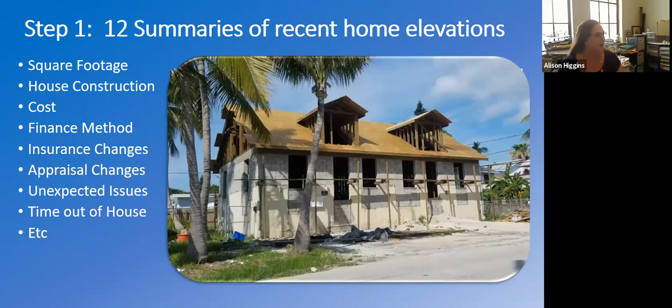This is where our partners really help us on these Keys-wide workshops. We want to hold these near our 5 biggest population centers, and this allows us to share what we've learned as well as document questions coming from our communities. We want to get as many contacts from interested parties, not only for this project, but for other opportunities that arise down the pike, because not everybody is going to be able to do this, even once we get them informed.

So the intent is specific outreach to low and medium income using our repetitive loss list, our county's weatherization program, because that is LMI based, and local Habitat for Humanity chapters that really have a specific program for homeowners that are low income. So they're on board to spread the word.

But then for the grand community, which is also obviously included, we're going to record webinars, newspaper stories, and radio interviews to help broaden this information for all. These pictures here are from the first concrete block elevation in the Keys. This is the case study for what happens when you invest too much on renovations and trigger FEMA's 50% rule mandating an elevation. This will be one of the most expensive examples in our repertoire.

The next bit is the one-on-one. So we've gotten across this general idea of what these might cost, but we'll have two different advisors made available by appointment to help homeowners work through their specific technical and financial issues in preparing to elevate. The intent is to give enough info to help the technical advisor, the elevation person, provide an estimate within $5,000. That will then help the financial advisor help them figure out a way to pay for it.

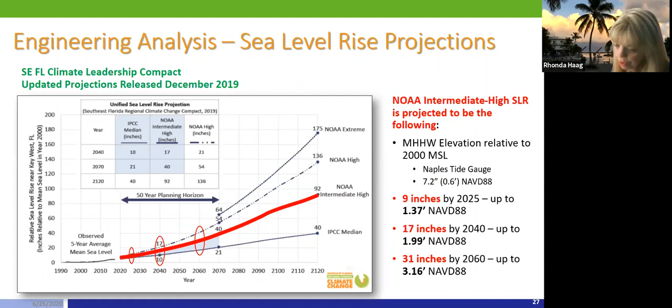Stillwright Point is a neighborhood in Key Largo, the northernmost area in the Keys. It's a very low level neighborhood. It's been around for about 45 years. It was built in a low area - they used fill from canals to build on, so it's very low.

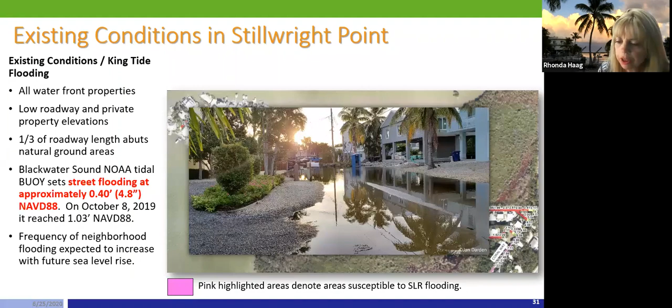This is an area showing one of the neighborhoods, what it looked like in the king tide. Another circle there, and that's this one coming up - just showing you examples of how it is.

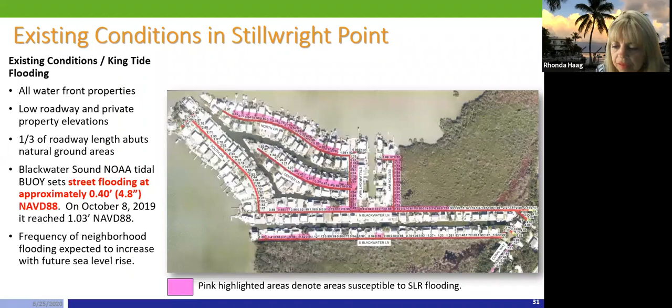So the engineering analysis currently underway is looking at the years 2025, current years, going up to 2045. 2045 is basically a target year, but we also glanced at 2060 and 2100 just to have an idea of the future inundation.

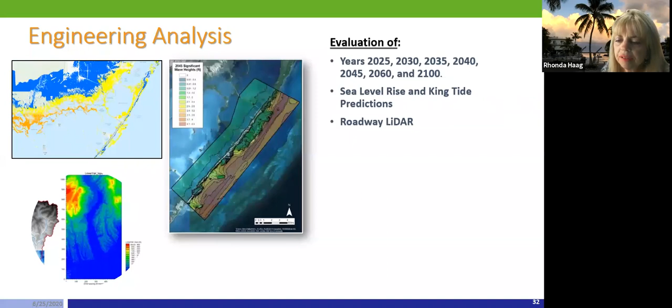Next, we looked at the sea level rise and king tide predictions. We used the mobile LiDAR.

When you're building higher and wider roads, you have to look at the anticipated storm surge in that higher, wider road. So you're going to have to build it stronger, able to withstand wind and waves and extreme events like hurricanes. Remember, when you have a higher road, it now has to be a stronger road.

This data will now allow us to project what the inundation is going to be on the road surfaces, and then allow us to complete our vulnerability analysis and prioritization of which roadways get elevated and when.

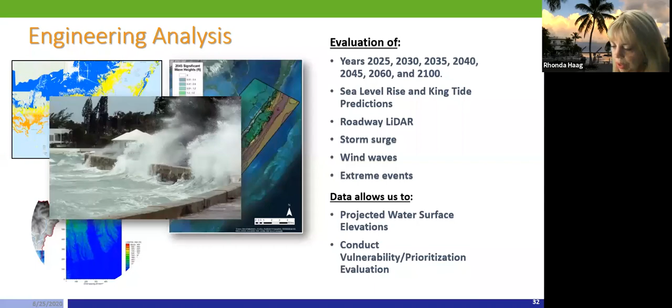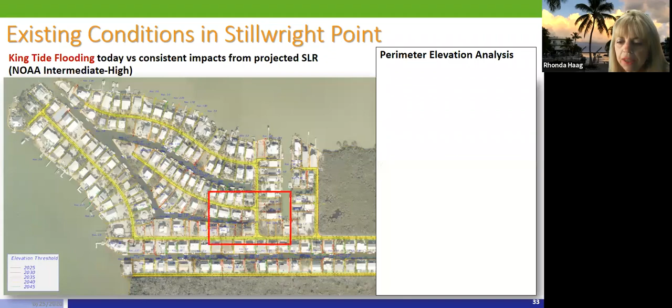So this is using the king tide flooding. We wanted to show it's a little bit different from sea level rise. Sea level rise comes in from everywhere. The king tide flooding is consistent with impacts from a projected sea level rise, but right now we are getting the impacts from the undeveloped properties. That's why they're very low and the water is coming in - they haven't been built up at all. It's coming in from the vacant parcels.

In the next 5 years, if we do nothing, we're now looking at increased access through 20 locations. By 2035, we're looking at 66 locations where access will come in for the king tides, and then 112. So you can see a pretty steep increase in king tide flooding if we do nothing.

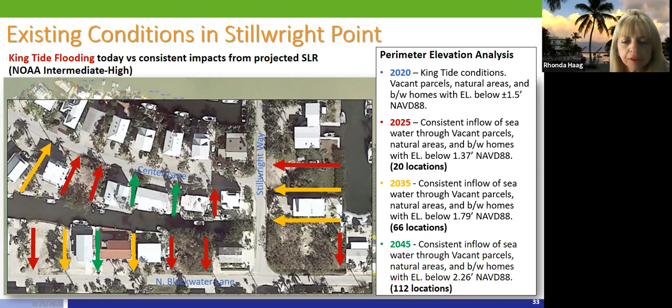So we came up with several options - actually 4 options. This first option is installing a curb and gutter system. We raise the road and then install a curb and gutter system to gather the storm water from the road and transport it away.

So there is front yard encroachment. All of these options have some level of encroachment. This one is a little bit less because we don't have the wider system you're going to see in the next option, but if we do elevate the roads, we are going to need to use a section of most residents' front yards to help build this higher and wider road.

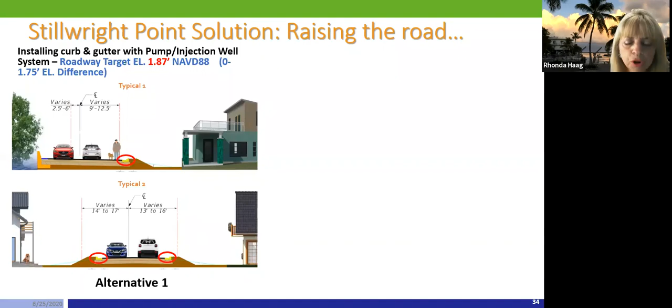And that's just a sample of where the curb and gutter system is.

So they're going to need to address the driveways, elevate the driveways. We don't know what we're going to do about that house on the left - there's not much we can do, but as the seas continue to rise, it's going to rise on the private properties. As a reminder, this approach only gathers the stormwater from the roads. So that's alternative 1. Alternative 2, next.

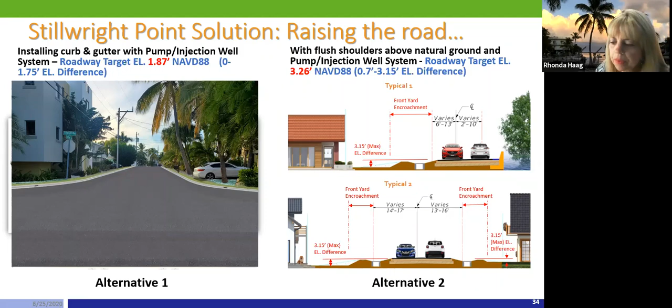Just an example of what this system would look like with the inlet box there, and we'd put a grate above that for walkability. So this is the current road again.

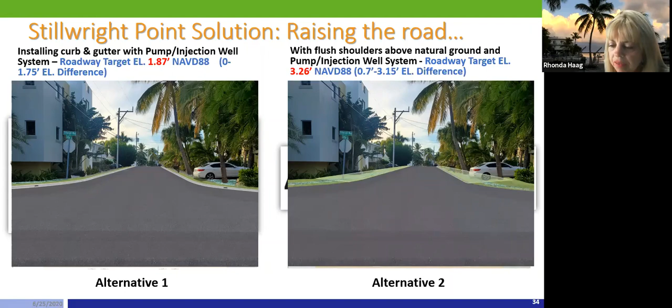You can see the green areas are where we need to reach out a little bit more. This is a wider system, so definitely more of an encroachment into the neighborhood. If you have neighborhoods with wider roads, it's not such a problem, but this area is very narrow.

As sea levels continue to rise and come into the properties, it will flow over into that stormwater swale at grade, and then we will pump it out. So we're looking at more operations and costs here because we'll be pumping almost continuously in the future. This is a much more expensive operation in terms of O&M, but it does help control water levels in the private yards.

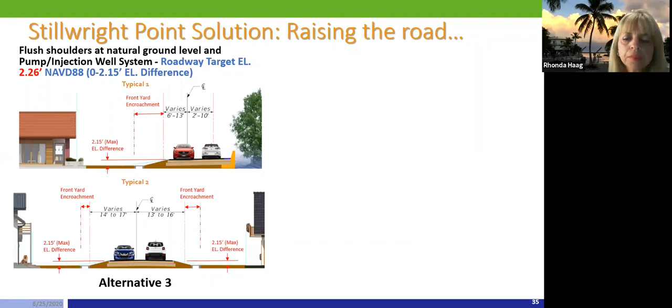To a degree. Wrapping up, you can just see an example there.

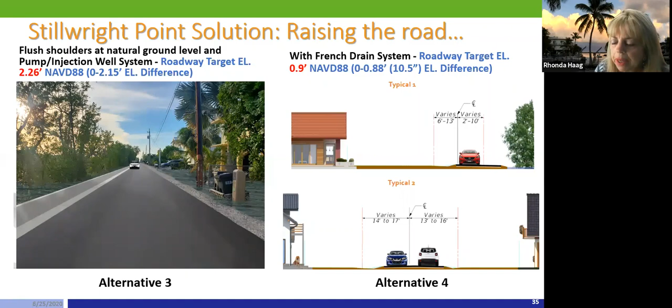And then the final one was where we just said, what if we just throw some blacktop on the road? So we looked at that. We're not elevating the road, we're only putting on about a few inches of blacktop. There's no stormwater system there. We would try some French drains, but with the elevated roads, we're not sure this would work.

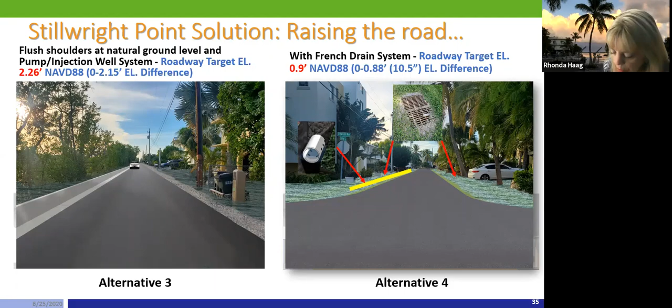You can see what this would look like. Basically, the water is going to come in and inundate it. The problem with this is when the water comes in, it's going to deteriorate the road conditions and it's not going to last very long. So this option is not really viable. It might last 4, 5, 7 years, but then the road would probably go away and the residents are going to have water on the roads. So it's a very short-term solution.

So I don't need to go over this. Minimum short-term benefits if only putting blacktop on, and the road conditions will still be wet and will go away.

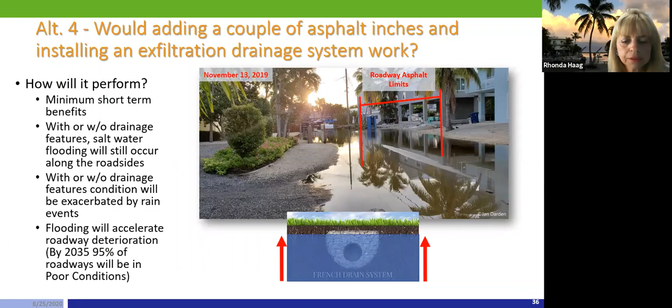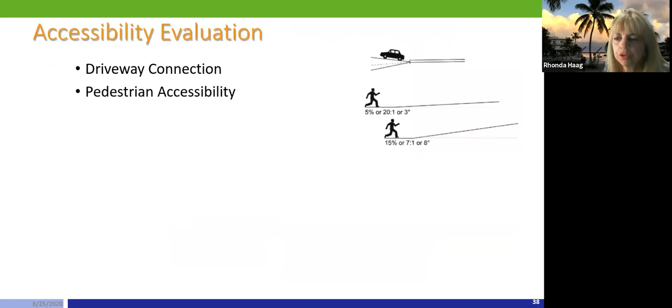We also looked at driveway connections. When you have an elevated road, you have to elevate your driveway. Your pedestrian accessibility is going to be modified depending on the road adaptation option chosen.

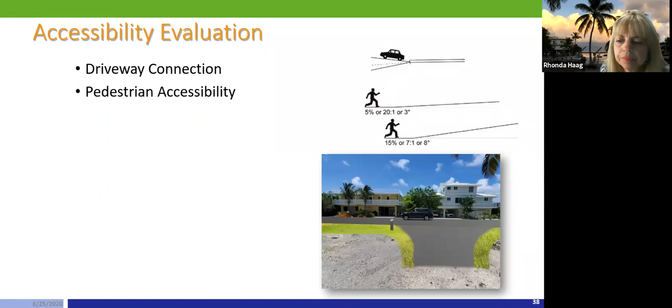These just show some examples. Walkability in the neighborhoods might be affected. If we're raising roads and they're only very skinny roads, you might not have a walkability option.

So options 1 and 2 appear to be the most viable, but options 1, 2, and 3 go out to year 2045. We're not sure option 3 is going to make it that far, so options 1 and 2 appear to be the ones that might be most applicable.

So the summary is low roadway, private property limitations. We're going to need to use right-of-ways. I already went over the evaluations, and I believe this completes my presentation.

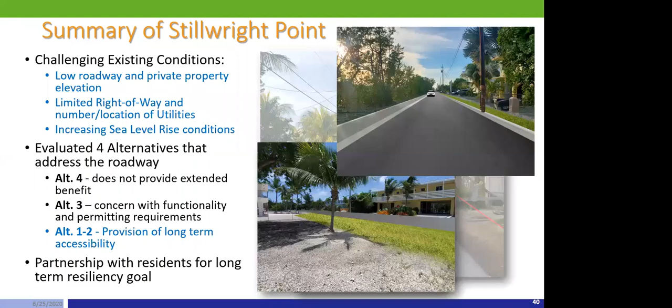You talked about difficult policy decisions and how expensive this work will be. There was a question about whether there's any thought given to abandoning right-of-ways or roadways, and whether the county is considering whether some of these things should be kept as assets. How is the county thinking or addressing these difficult questions?

So that's what the countywide roads adaptation study is all about. Not only is it going to prepare an analysis of what needs to be done in terms of road elevation, it's also going to look at cost. For instance, if this comes in at several billion dollars, we don't know yet because that's why we're doing the study. But if it's 4 or 5 billion dollars, that might not be something the county can afford.

That's when we're going to need to look at, okay, if we can't afford to do this, what are we going to need to cut? Are we going to need to lower the level of service countywide? Or are we going to need to look at individual roads?

Perhaps, as you saw in my presentation at the summit in December, if there's a neighborhood road that's going to require 20, 30, 40 million dollars worth of adaptation, and there's only a few residents that live on that road, we may need to do a different level of service for that road, perhaps letting it get wet during the king tide season, or we may need to look at other options like abandoning that road altogether.

So that's part of the countywide roads adaptation study. We'll be looking at those types of levels of service and policy decisions.

So the elements of this plan include, one, quantifying water - understanding how groundwater influences our built environment - and looking at sea level rise projections in relationship to storm surge. Two, the plan defines the current conditions, establishing building typologies in these historic neighborhoods, everything from cottages and single family homes to catwalk style apartments and low rise hotels.

Next, the plan looked at best management practices. For example, we looked at Venice as it relates to adaptation and how we're adapting those structures. We looked at Amsterdam for the living with water approach. We looked at Chicago and Galveston as we think about raising these historic assets. And then we also looked at landscaping - for example, Oregon has a very robust program. And of course, stormwater management is a component we have to think about, so we did case studies for New York to understand the best management practices and how that can be applied to Miami Beach.

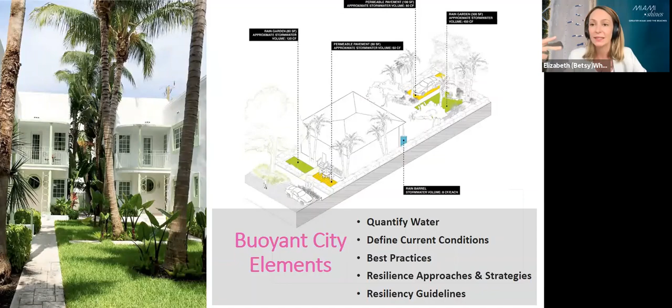Utilizing this information, Schulman was able to put together resiliency guidelines, separated into three distinct categories: how do we take action now, how do we adapt in place, and how do we raise and become resilient into the future?

So that's one piece, our built environment and historic assets. We also have to think about our green infrastructure. Another element that makes Miami Beach unique is that we are a tropical paradise, so how do we protect our urban forests with a strategic approach, understanding that we have challenges that any urban city has, including narrow right-of-ways, underground utilities that are like spaghetti beneath the streets and sidewalks, high groundwater, and in our case, how the city as a whole is adapting to sea level rise and how that urban canopy is going to need to adapt accordingly.

So the Urban Forestry Master Plan - I think the most exciting piece of the plan is this toolkit. Calvin Giordano and Davey Resource Group developed this toolkit to help us target specific design and implementation, looking at how we plan, plant, and maintain our trees.

Selecting a right tree, we established an adaptability and resiliency index. There's 10 factors that different neighborhoods and types of trees were scored based on, such as salt tolerance, resilience to relocation, which is going to have to be an option as we raise streets, as well as thinking about wind and other climatic conditions.

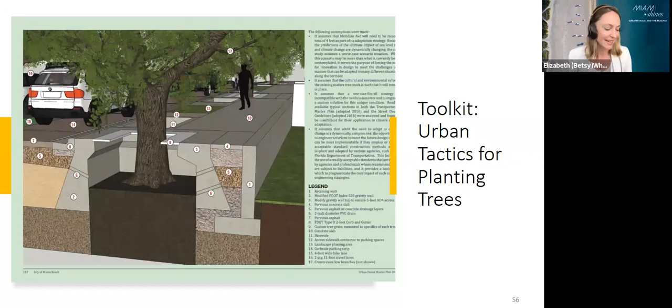So I just want to conclude that the reason we're doing all of this is to maintain our viability as a city. An important piece of that is maintaining our bond rating. So it's everything from adapting our stormwater system to looking at our neighborhoods and built infrastructure that's allowing us to reduce our risk and keep our bond rating.

Final slide, and then we're done. So we're ready for questions and happy to dive into more info.

Thank you so much, Elizabeth and Amy. There was an interesting question that came in on the ICF modeling and cost benefit analysis. Are you able to comment on the equity and distributional considerations that were included in the analysis? How might they have influenced the results? And somebody also asked a similar question, you don't have to take both, but how, if at all, are you thinking about the COVID pandemic and how that might impact your economic model?

Sure. Well, the economic model that was used is called the hedonic model, and it looked at about 15 years of purchasing decisions in the city, and it also looked at elevation. So that's really how that model was created.

But going forward, we have a study with Jacobs Engineering, and they have about 4 different options for the order of the neighborhoods that we would select to move forward with our adaptation programs. They're taking into account a few different things: one being the current infrastructure that is below the streets, in terms of how quickly they need to be replaced, and also the extent of benefit, which is really looking at the population that's in a certain area.

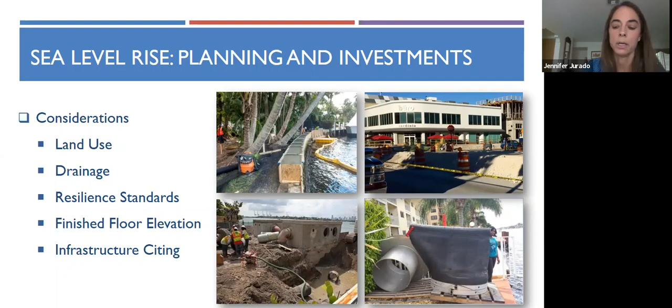And so now we'll be quickly moving to try and incorporate this update in forthcoming work. But we do have a lot of investment that's advancing and informing standards that we're going to be adopting just this year that doesn't yet incorporate those changes, and that's realized because we just have so much process.

So I just want to acknowledge that our early planning tools in our county have been focused on, first, the establishment of a priority planning area map. This delineated the areas at increased risk of flooding with the 2-foot sea level rise projection. Most of our planning was based upon a 50-year planning horizon, anticipating that increase of 2 feet.

That required that when applicants, municipalities, and private developers would be looking at changes in land use within these areas, they'd be bumped up to a higher level of review, and we'd ask very specific questions about resilience planning and investments, not just for the site, but in the coordinated surrounding area and associated infrastructure. So that's been part of our process since 2012.

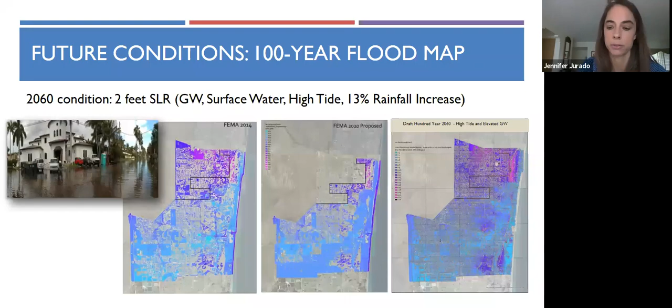Next slide, please. So that takes us to today, where we are wrapping up this work, all based upon the 2-foot sea level rise scenario, just as we've updated our projection. So the next step for us is to go back to that early work and start to amend some of those early work products, while we also incorporate these changes into existing projects. We are in the process of updating that priority planning area flood map that I shared with you.

It was initially adopted in 2012. We had an amendment in 2015. We're in the process of public workshops now, bringing forward the update.

I'll note that that's not only relevant to land use planning, but it's also a map we use in all of our own county capital budget processes. It's something that's also to be incorporated as we look at surtax funded projects, which are funding transit improvements in our community over the next 3 decades.

Next slide, please. We're also working with the USGS to update our groundwater table map. As I indicated as an antecedent condition in our flood modeling, we expect to have the updated groundwater table map available to us by the end of the calendar year. We'd then expect to take that through our regulatory process, knowing all of these tools and planning efforts are iterative.

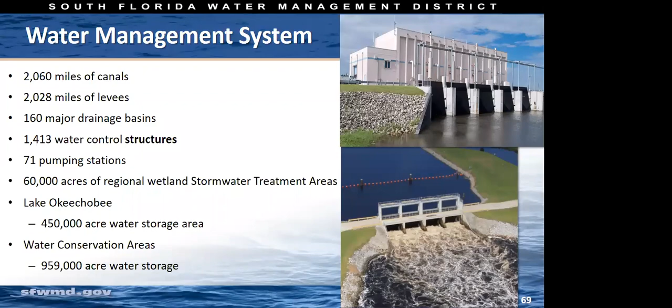Advance slide, please. So the reason I wanted you to think about structures is because we have several of them that run along our coastline, the coastal structures. They serve a dual purpose. They are the structures we use to provide flood control. We open them to discharge stormwater, and that's how we keep most of the inland portions of the district from flooding. But we also use those structures as salinity barriers.

The thing I want you to note is that they are gravity structures, almost all of them, which means they work when the water level on the inland side is higher than the water level on the ocean side. Water flows downhill from the high side to the low side, and we're able to discharge water under those conditions. The challenge is as sea level rises, the tailwater condition on the ocean side gets higher, and at some point it will be high enough to reduce what you can discharge from the inland side, or even higher than the inland side, requiring you to close the structures so you're no longer able to provide flood relief when it rains. That is the challenge the district has to deal with as part of the primary system. Next.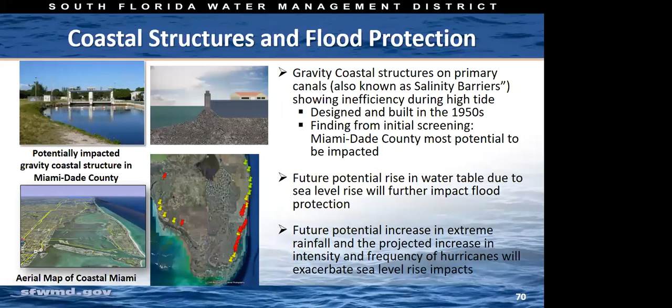Realizing this, more than a decade ago we went through and did a vulnerability assessment at all of the coastal structures to see how at risk they were to rising sea level. The color coding shows the dots in red representing the most vulnerable structures, and the ones in green are where we have a little more leeway or more time.

For those structures in red, most of which are in Miami-Dade and Broward County, and some also on the West Coast in Collier County, as the tailwater or ocean side rises, those structures are being closed for longer periods and becoming less efficient at providing flood relief. The quick question for us is, what would we do as time goes on and we have to keep operating the structures? Do we need to plan for some type of adaptation?

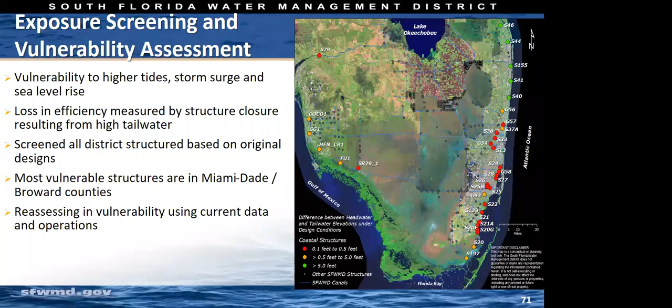To answer that question for the entire region, the district put in what's known as a flood protection level of service program. This program allows us to use a formal and systematic approach to identifying and prioritizing the agency's infrastructure needs, flood control assets especially.

As I mentioned earlier, the C&SF system was built many years ago. Some of these structures were built in the 40s and 50s and are approaching end of life. As they come due for refurbishment or possibly replacement, one question we'll have to answer is can we replace them in kind? And if we do, will they continue to provide the level of service they were designed for, or would we have to adapt or modify these structures so they can continue to serve the region for the next 50 to 100 years?

To be able to do that, some type of analysis is needed, relying on looking at projected changes, including changes in sea level rise or the tailwater for these gravity structures.

For the level of service program itself, we broke it into three distinct phases. They interlock and work well together, but the initial phase is what we call the assessment phase. It's a problem-finding phase, not looking to fix anything—just identifying if flood control assets are doing what they're supposed to be doing. That's what I'll be spending time talking about with you today.

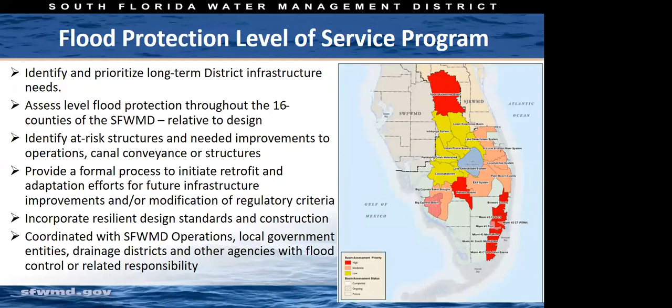So how do we use the sea level rise projections? This is the summary slide so you know exactly what I'm going to say, and then I'll get into the topic I want to talk about.

We use it in each of the three roles in a bit of a different way. For the assessment, we use it in a somewhat non-traditional approach, which is what I'm going to share with you today. We use it in all phases of the work—framing the problem, defining boundary conditions, identifying what the issues are, and determining what the time frame for action is.

You've seen this curve, and I could spend time talking about it, but for the sake of time I'll avoid it. Essentially, for all of our coastal structures, as you've heard from many speakers today, there's a traditional approach where you pick a planning horizon based on the type of asset you're studying, and based on that timing horizon you select a sea level rise condition and then do your analysis.

One thing we ran into with that program very early was that we had a program running for multiple years. The assessment piece cycles through the district every 8 to 10 years and continues in perpetuity. So we had to find a way where the analysis would stand the test of time and accommodate changing projections on sea level rise, since you have to keep updating based on new information.

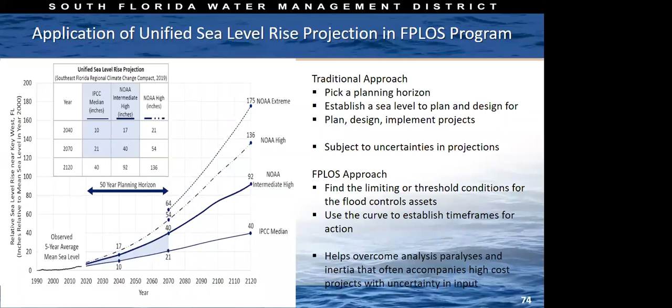And if you can find what those thresholds are, then you can back your way into seeing what kind of sea level rise conditions will trigger those thresholds. This approach has been called the conceptual adaptive resilience model, and it's what we opted to use with the assessment portion of our level of service program.

Essentially, what it involves is you take a look at your assets, in this case the gravity coastal structures, and they lend themselves very well to this type of approach because they rely on physics. There is a combination of headwater and tailwater that will discharge a known volume. At some point when your tailwater rises enough, you cannot discharge that volume.

Doesn't matter what made it rise. But when you hit that point, then you know you are losing efficiency, and at some other level your structure actually fails, it doesn't do the job it was meant to do. So instead of starting with what the level of rise was, we started by doing the analysis to find what the thresholds were for this structure.

And on the chart you're looking at, that's the blue dotted line, and it says if your tailwater gets to that line, then your structure fails. And then once you've identified that, pick a curve, it doesn't matter which curve it is, and you go backwards from that time.

Based on the length of time it takes to implement a project. And for many of our major structures, it could take anything from 8 to 10 years to permit and build. So you back up, in this case let's assume it's 10 years, and you look at what the condition under the curve you have picked is.

And that becomes the threshold that you need to reach to initiate the replacement action, or the particular action you're choosing to take. Now if you are on an aggressive curve, you would end up having a threshold that is on the high side, and as you advance towards that particular threshold in time, you would begin to take the necessary actions to start the project to replace your structure once that threshold hits.

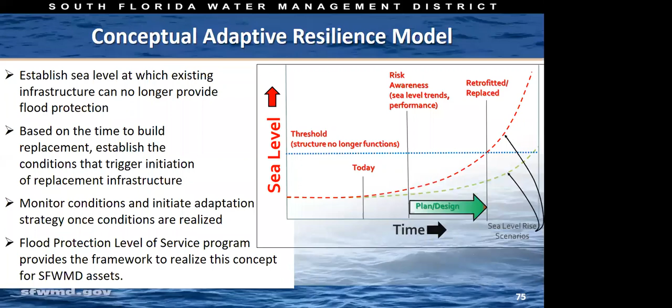Essentially, all I want to share with this last slide is that in looking at our assets in this case, we recognize that not all actions would require you to build something. The action you need to take could be an operational change, and the lead time for that could be small. On this chart, that's the item that's in the time frame T1.

Or you could have something that's a regulatory solution mixed with some refurbishment of the existing structure, and the time frame for that could be a little bit longer, in the time frame of T2. And you could be in a third frame where you actually have to do a full replacement or something major, assuming that retreat is not the option you've selected, and that will be in the time frame like T3.

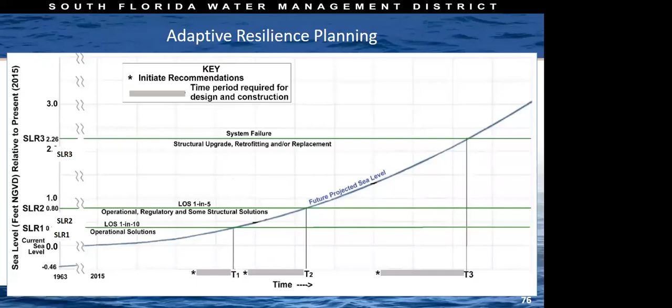And so what we've done with the level of service program, at least with the assessment phase, is to adopt this adaptive resilience plan model, use it in what we call an adaptive resilient planning framework to do a level of service assessment. It's proved very useful for us, and I'm hoping that for others who have projects that lend themselves well to setting thresholds, that you consider this option.

It takes a lot of the controversy off the table, and I will be glad to take questions. Thank you so much, Akin. That's certainly a very innovative model for applying the projections for future planning.

I'm going to put two quick questions into one, and I apologize that we are behind here. First is whether the water management district's members are elected or appointed. And second, I'm sorry, I can't hear your question.

You can't hear me? Can you hear me? Akin? Akin, I think it might be on your end. So we're gonna move forward, and if we have time at the end, we'll come back to your questions.

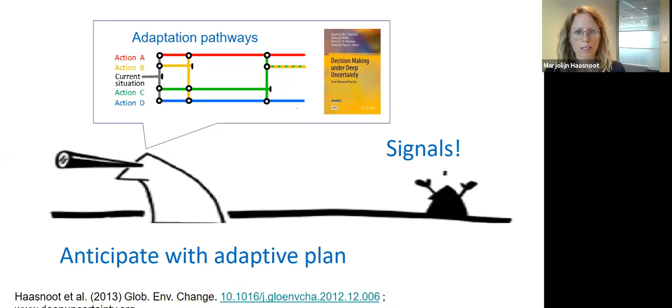Maybe you can click on that. Click on the slide, please. So what you see is that in any analysis, you start with the description of the system and the objectives and what are the main uncertainties. But what we then try to do is assess both the vulnerabilities and the opportunities, and identify kind of thresholds, or what we call adaptation or opportunity tipping points, when objectives are not met anymore and when new decisions are needed.

It's similar to what Akin just explained in his last few slides. With these thresholds, and when you know under what condition new actions are needed, you can explore different sequences of actions, and these are adaptation pathways. Once you have explored this roadmap of possible pathways, you can map this in a metro map, showing the solution space. Based on that, and an evaluation of the different pathways on cost and benefits, you can decide on what could be an adaptive plan.

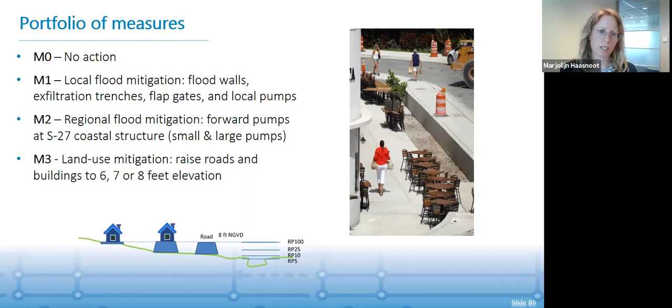And then we explored different levels of elevation. Next slide, please.

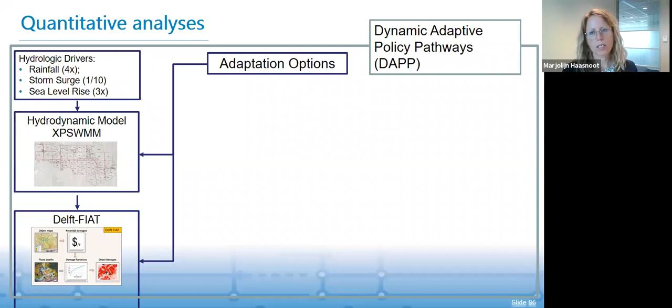So we did this quantitative analysis with a hydrological model, done by a consultant, ADA, which was then input for a damage model, the Delft-FIAT model, where we used water depth, and assessed the damages to roads and buildings, translating that into an expected annual damage map. We did that for all the portfolios of measures. Can you click on this and go to the next slide? Because that information was used to assess these adaptation tipping points - under what conditions would we reach this threshold?

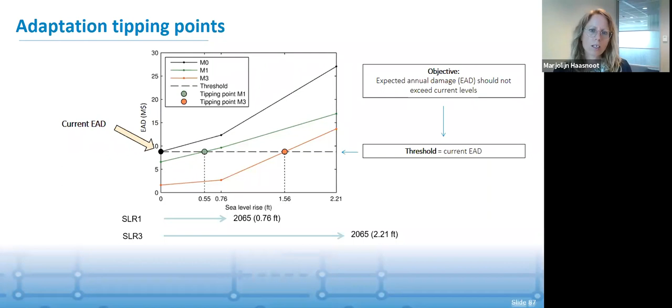But at some point you would need to implement these land use measures. Of course, it takes a lot of time to implement them. So an adaptive plan could be to install some pumps and at the same time start changing your land use.